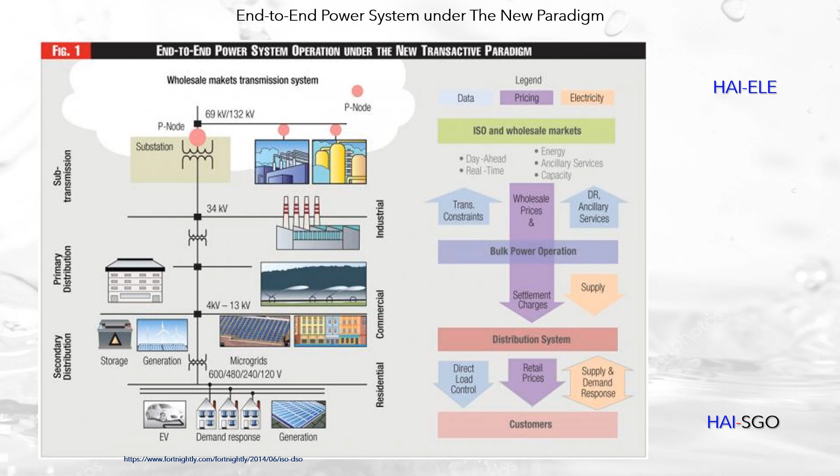HAI-ELE and HAI-SGO cover all levels of the electricity systems. Electricity system and wholesale market optimization models. Hydro system physical modeling. HAI-WATER corresponds to a general model that includes all kinds of hydraulic components: reservoirs, hydroelectric power plants, rivers, overflow channels, connection points and pumping stations, demands, like irrigation, aqueducts, environmental, industrial. Components can be freely linked to form any topology, like pumping storage systems.

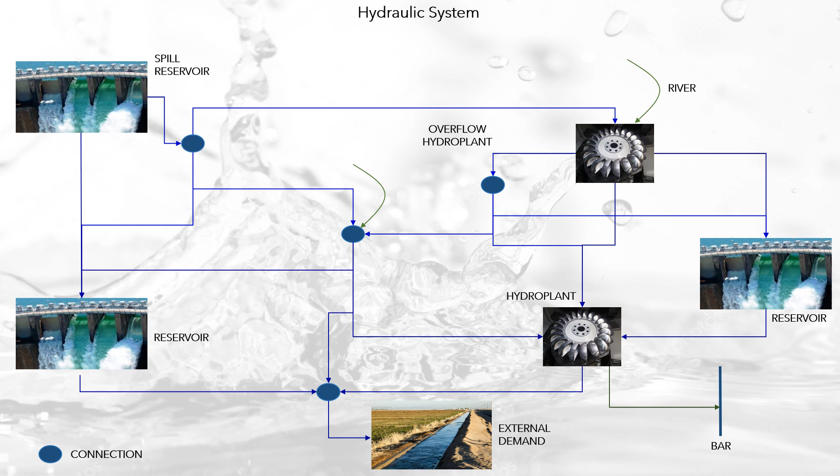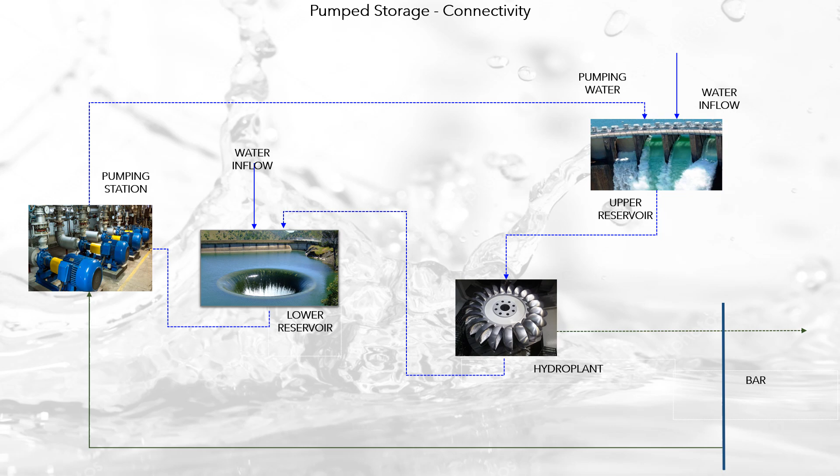Hydroelectric power plants are modeled independently of reservoirs, so plant-reservoir connectivity must be established. The regulation capacity of the reservoir is simulated in detail, so such a simulation consistently represents the dispatch of the power plants, considering their ability to regulate the multi-annual, annual, hourly water resource.

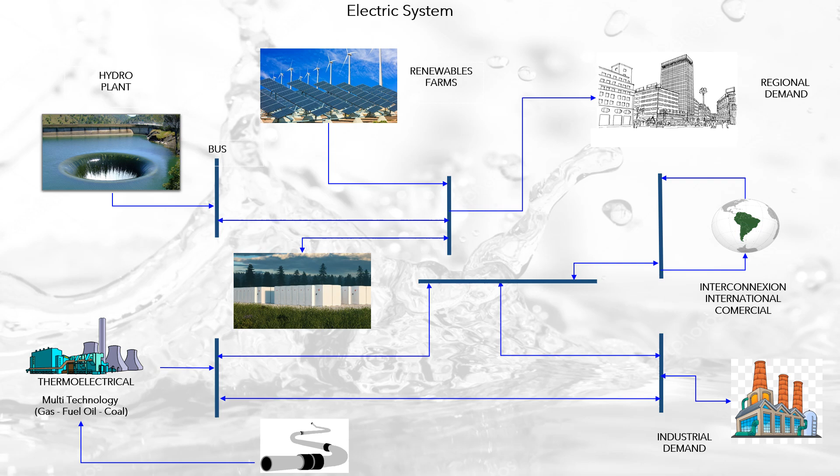Electric system physical modeling. Electrical connectivity is carried out through a network of circuits and bars that integrates different types of installations: power plants, like hydroelectric, thermoelectric, coal, wind, solar, biomass; places of demand, like industrial, cities; regional interconnections and energy storages. HAI-POWER includes the simulation of several types of renewable energy sources and energy storages. For each type of electrical asset, HAI-POWER includes the exact equations for simulation.

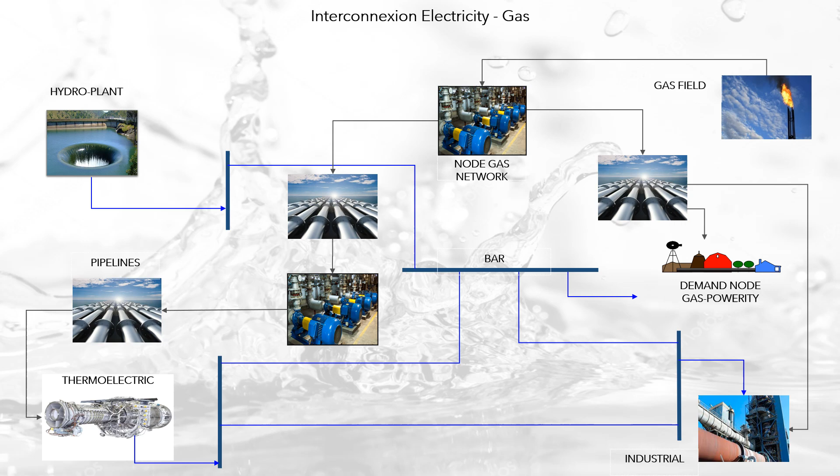Natural gas system physical modeling. HAI-GAS describes the process of supply and demand of natural gas. From this point of view, its integration with the electricity system determines the economic equilibrium of electricity-gas markets. The entities of the natural gas system are nodes, which connect the gas system installations. Production fields. Consumption zones, discriminated by sector, for example refineries, heavy industries, residential, vehicular, and commercial thermoelectric power plants.

Transport systems: I, pipelines, and II, multimodal transport systems using vehicles; pumping stations, which compress the gas to transport it; and ports, which receive and ship liquefied natural gas, LNG, and have gas storage capacity. Connectivity between the electricity and gas sectors occurs through the demand for natural gas for use in thermal plants, and the substitution of the demand that can occur between gas and electricity.

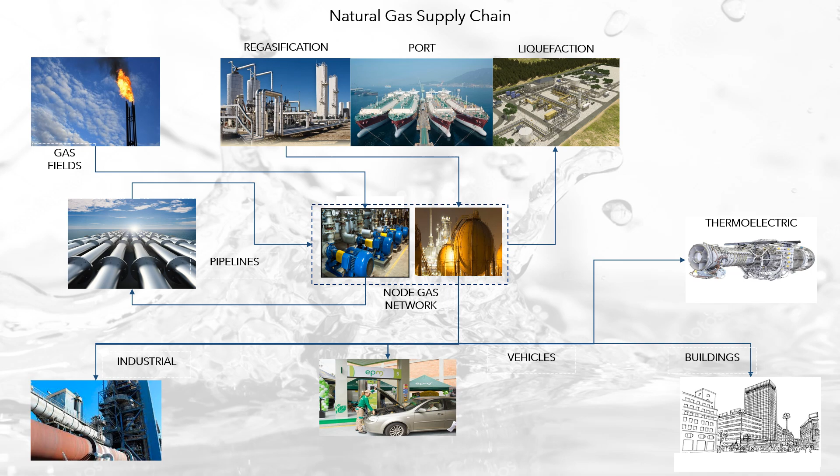Electricity system and wholesale market mathematical models make up a flexible decision support system that provides different types of services in an integral way. They can be classified into integrated dispatch of generation plants, optimization of generating agents, and predictive analytics of stochastic processes.

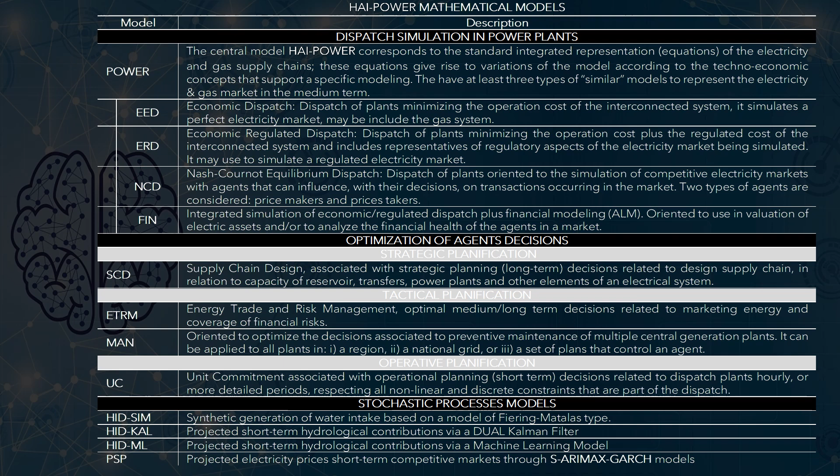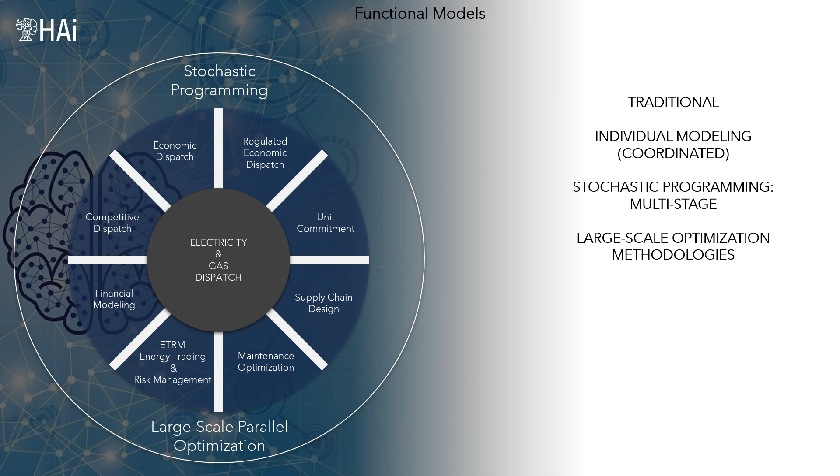Traditionally, the optimization models in the electricity sector consider individual modeling with exogenous coordination between models, based on multi-stage stochastic programming, and using large-scale optimization methodologies. The differences with the state-of-the-art modeling, provided by HAI-POWER, are integrated holistic modeling, scientific risk modeling, multidimensional uncertainty, parallel optimization, and autonomous real-time distributed optimization.

Three types of connectivity of the generation system and the transmission power grid are considered. Ideal single node: ideal dispatch ignoring the transmission system. Electric transmission network connectivity, based on the detailed connectivity of the electricity transmission system using bars and circuits. Operative areas connectivity, when the user does not have, or does not want to use, the detailed configuration of the electricity transmission grid.

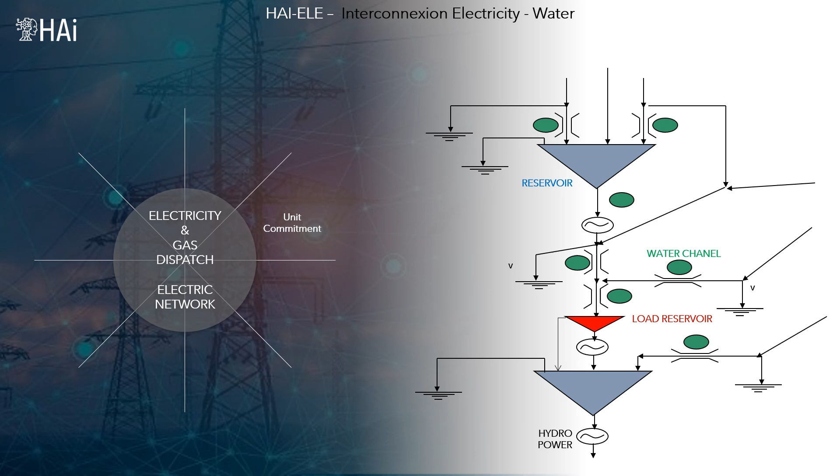It is possible to use the connectivity based on operational areas, including limits on the transfers between areas. Interconnection electricity-gas integrates the electricity network with the natural gas network. Interconnection of electricity and water can be fully detailed, including travel times between nodes and transport restrictions in water resource conduction channels. The central model of Hypower is the standard representation of the electricity and gas supply chains.

These equations give rise to variations of the model according to the techno-economic concepts that support a specific modeling. There are at least 4 types of economic models to represent the electricity and gas market: Economic perfect dispatch, EED; economic regulated dispatch, ERD; Nash-Cournot equilibrium dispatch, NCD; and unit commitment, UC. The EED is the core model of Hypower, as its equations/constraints are used in multiple specific models that the agent requires to address decision support needs.

EED and the UC models optimize the dispatch of generation infrastructure, minimizing the cost of operating the electricity system, which simulates a perfect electricity market. The differences between these two models are the detail of modeling. EED is oriented to planning and UC to real dispatch.

Economic regulated dispatch: dispatch of plants that minimizes the cost of operation of the interconnected system and includes representative aspects of the regulation of the electricity market being simulated. It does not correspond to a model of economic equilibrium; however, it is an easy and fast way to represent regulatory considerations based on optimization models.

Nash-Cournot equilibrium: dispatch of plants oriented to the simulation of competitive electricity markets with agents that can influence with their decisions on transactions occurring in the market. It can be used to, among others, project the dispatch of a competitive market, and study the exercise of dominant market power of agents.

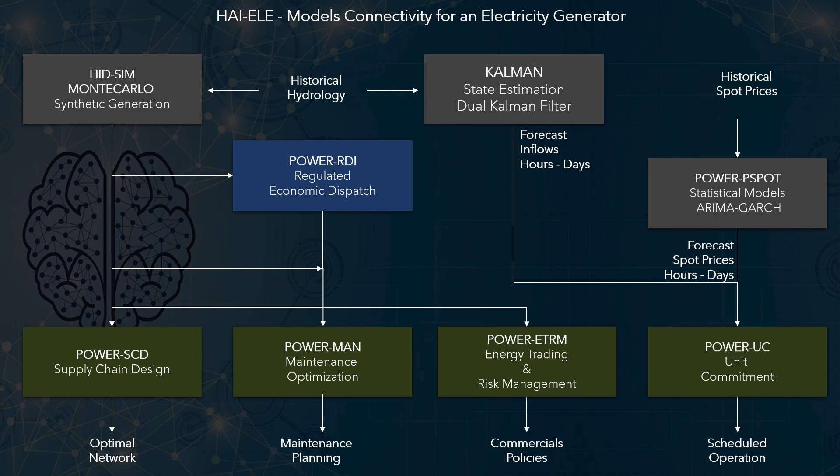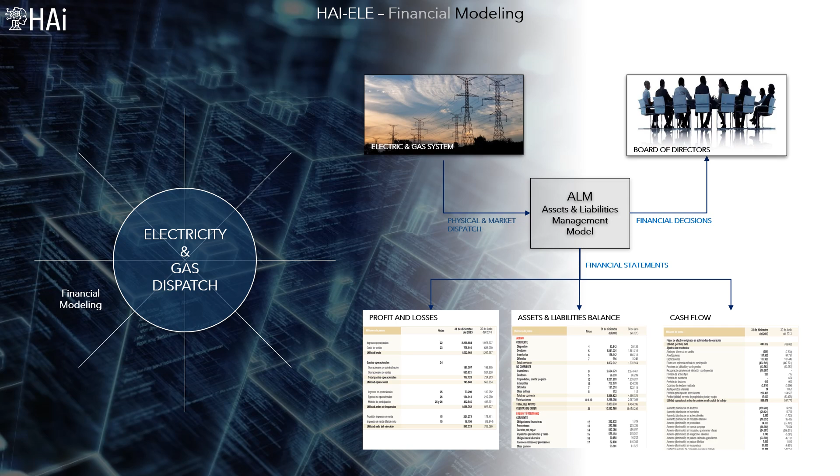4 models are considered fundamental to support the strategic, tactical and operational decisions of an agent that operates generation plants. The diagram presents the design of an integrated set of mathematical models to support the decision-making of a generator agent. Electricity dispatch and financial analysis: integration of dispatch models with assets liabilities management, ALM, financial models including risk management, to perform analysis of the financial impact of decisions. The main applications are the valuation of income and expenses of investment projects, energy installations, and valuation of energy companies, and integrated optimization of investments by global energy companies, taking as a reference the regulatory laws of the different regions or countries. The financial modeling results individualize the operating income and expenses, and can include all types of legal accounts.

Electricity supply chain design and risk management, associated with strategic planning decisions related to resilient design of the supply chain, in relation to capacity of reservoirs, transfers, power plants and other assets of an electrical system. It may include risk management and financial planning.

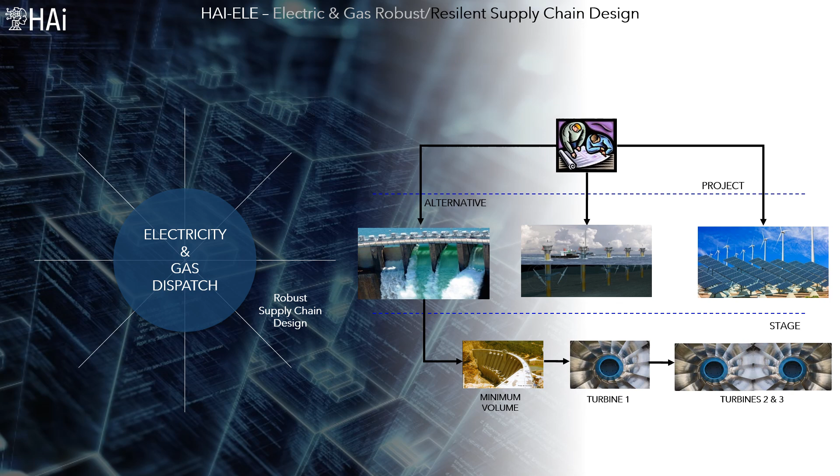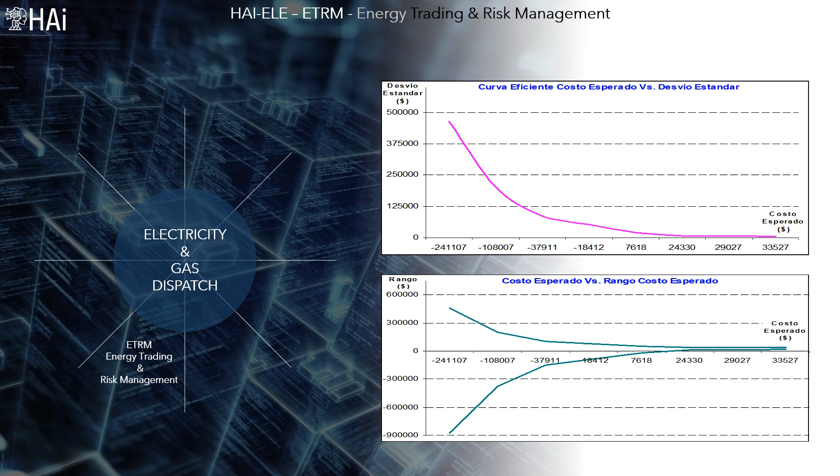Energy trading and risk management. Optimal decisions related to trading energy and coverage of financial risks based on standardized or non-standardized bilateral contracts. It corresponds to a set of mathematical models aimed at supporting the decisions of the different agents involved in energy trading in long-term market, spot market, and secondary markets. The result of a risk analysis is the definition of Pareto curves of risk versus expected cost, based on which the decision maker must define the risk position he wishes to assume, varying between risk-prone and risk-averse.

Maintenance optimization is oriented to policy making for preventive maintenance of multiple central generation plants and other electrical assets. It can be applied to all assets in a regional or national grid. Hypower can be implemented following the principles of PHM, prognostics health management, for industrial asset maintenance, integrating specific models of predictive analytics for asset components and prescriptive analytics to optimize the integrated operation of the asset network.

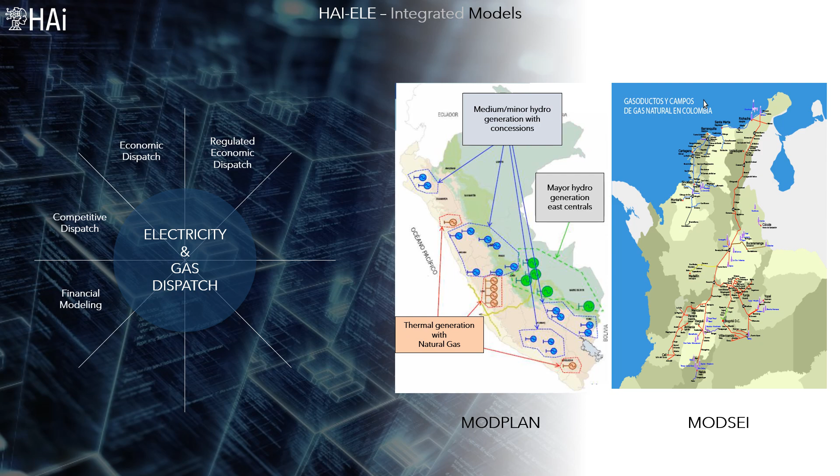Hypower has been used by the ISO in Peru and the Market Supervisor in Colombia for planning and decision-making purposes. Hypower includes some predictive analytics models. Spot price modeling: the prediction of spot prices of the energy market is fundamental for the decisions made by an agent that participates in that market, whether buyer or seller, generator, trader, or distributor of energy.

This is because the decision maker requires that the model's results that produce spot prices be used in other mathematical prescriptive models. The mathematical models to be used depend on the planning period, short, medium or long term, and the type of market considering the dispatch of the plants, by mathematical model, or by market agents offers in a free market. In free markets the situation is complex since the law of price formation cannot always be explained based on mathematical rules, explicit, clear and universal, that may integrate a mathematical model.

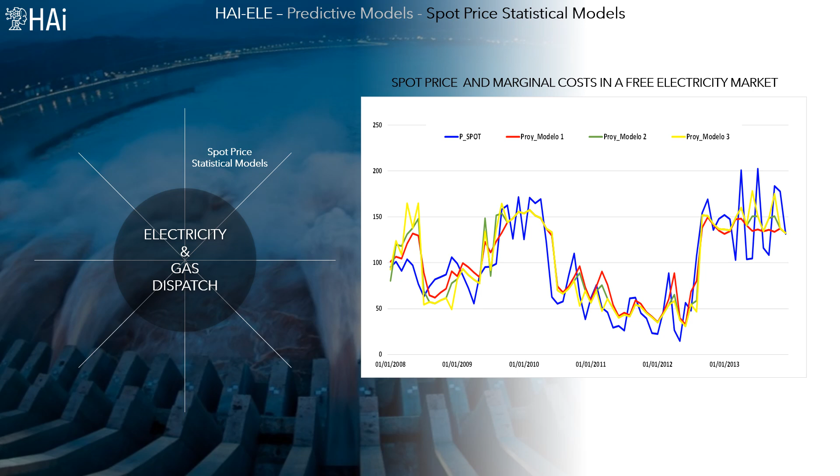Synthetic generation renewable energy sources. For the generation of synthetic scenarios of climate variables, there are two requirements: short-term, hours, days, and medium/long-term, weeks, months. Specific short-term models must be built for each renewable source. For the medium and long-term, there are three alternatives to generate synthetic scenarios.

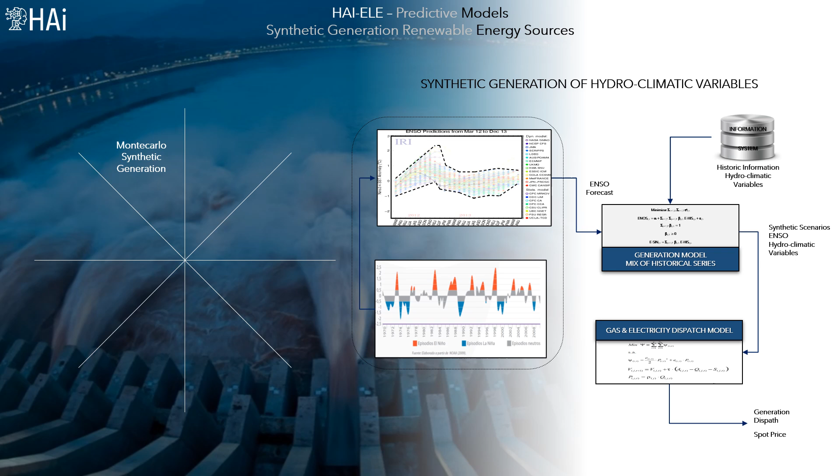Smart grids optimization models. In a regulated environment, generation, transmission, and distribution are operated by a vertically integrated enterprise, usually a state-owned, which has a monopoly on the supply of electricity. Conversely, in a deregulated environment, different parts of the electricity grid are owned and operated by different actors, and electricity markets provide a platform that fosters competition among participants.

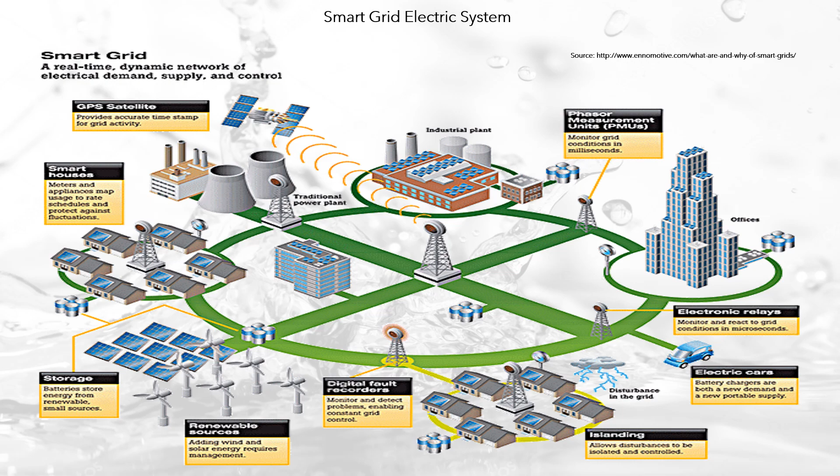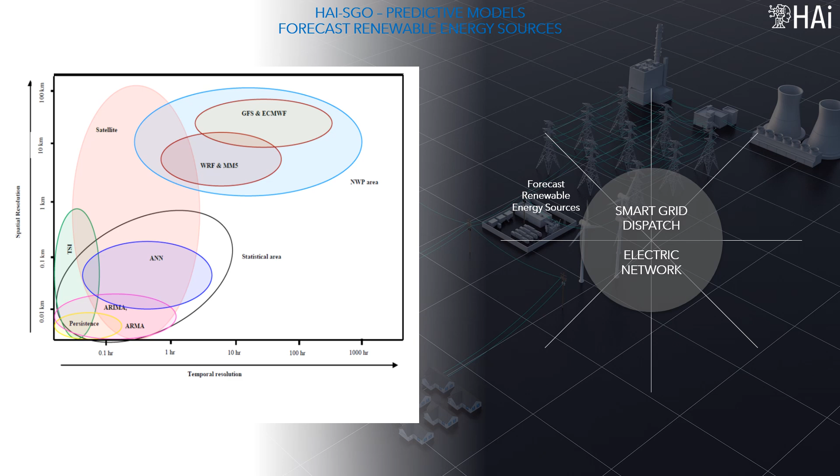As each smart grid is, it requires a specific decision support system that allows the operator to interact with the entire electrical system. HAI-SGO provides all the analytical elements necessary to configure the specific DSS that each case requires. Forecast renewable energy sources. They correspond to predictive analytics models focused on the prediction in the specific sites where the generation plants are located. Forecast of demand energy. Demand projections per years, months, weeks, days, hours.

HAI-SGO is integrated by the following optimization models. Economic dispatch of the smart grid, optimization of the management of electrical energy in small cities, factories, universities, shopping centers, office buildings, urbanizations. Smart grid unit commitment, optimization of the dispatch of the electrical load in real time, or in the short term. Smart grid configuration, optimizing the network topology.

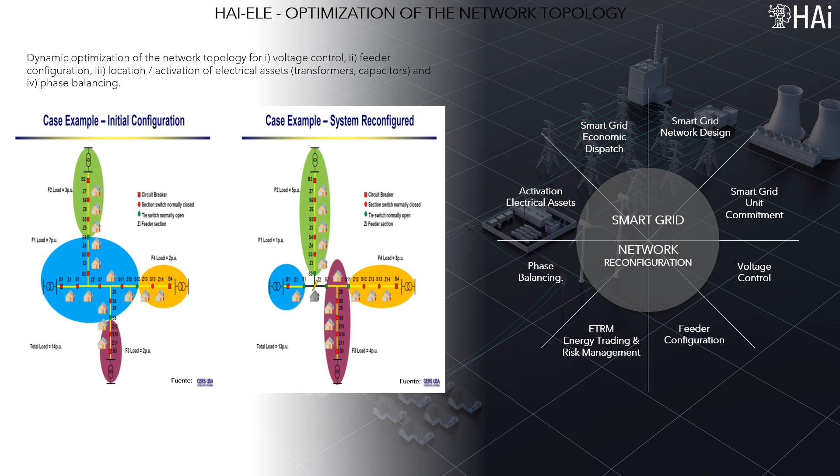It considers voltage control, configuration of feeders, location or activation or reallocation of electrical assets, like transformers, capacitors, and phase balancing. Smart grid design, optimization of the design or redesign of smart grids with modern power technologies. ETRM, energy trading and risk management, decisions to buy and or sell electricity, in a long, medium and short-term market, one day in advance or the day of dispatch.

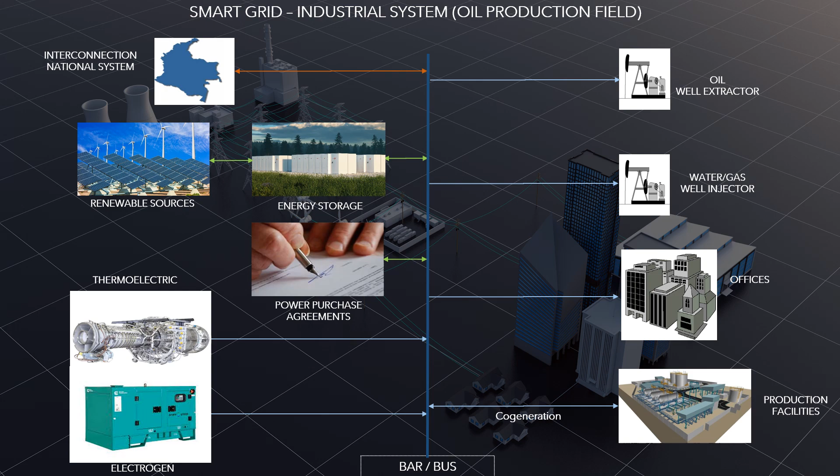Industrial energy efficiency. The technical economic viability of energy storage coupled with the proliferation of energy technologies based on renewable energy sources has changed the landscape of the industrial sector, since it is now possible, and increasingly efficient, to generate renewable energy and store it for use in due time. In practice, all industrial companies can be agents that interact in the electricity market, acting as co-generators and carry out commercial activities and transactions. This, together with the industrial Internet of Things, increases the pathways to achieve industrial energy efficiency.

Industrial energy efficiency results from the integration of production processes, transformation of matter, with industrial energy services, energy transformation, aimed at the simultaneous optimization of both industrial production and energy conversion that is related to polluting emissions of gases and liquids, associated with increasingly demanding environmental control laws.

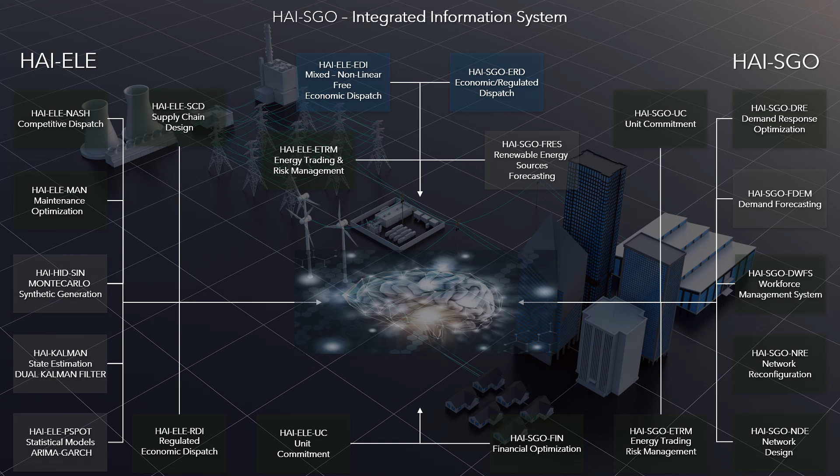The HAI-ELE and HAI-SGO models can be integrated with complex industrial process models, in which it is necessary to redesign the power supply system according to the new power technologies. This type of model includes the simulation of polluting processes, for example, combustion in furnaces, to determine the optimal mixture of fuels in accordance with environmental regulations. HAI-ELE and HAI-SGO integrate the models and information systems around a common data model.